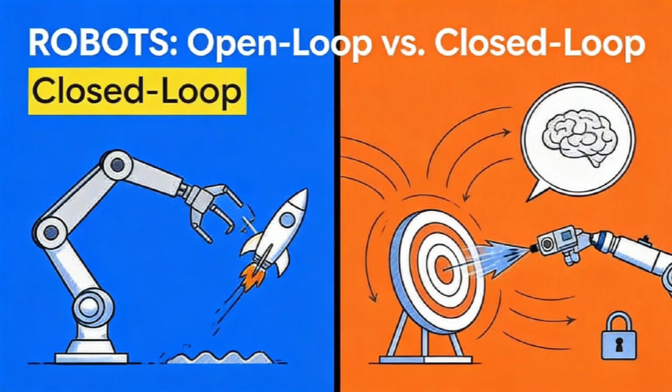Hello and welcome. Have you ever looked at a robot arm and just wondered, how do we get a pile of metal and motors to move with such incredible precision, sometimes even with a sense of grace? Well, today, we're going to dive into exactly that. We're going to follow the journey of a robot as it learns to move, evolving from a blind, clumsy machine to one with a perfect touch.

So let's start with a really simple but totally fundamental question. You tell a robot arm to move exactly 10 centimeters. But what if something gets in the way? What happens when the messy, unpredictable real world interferes? Honestly, figuring this out is the first major hurdle for any robot that has to operate outside of a perfect, sterile lab. And this problem brings us right to the most basic type of robot control out there. It's called open-loop control. It's simple, it's cheap, but it has one massive and sometimes pretty dangerous flaw.

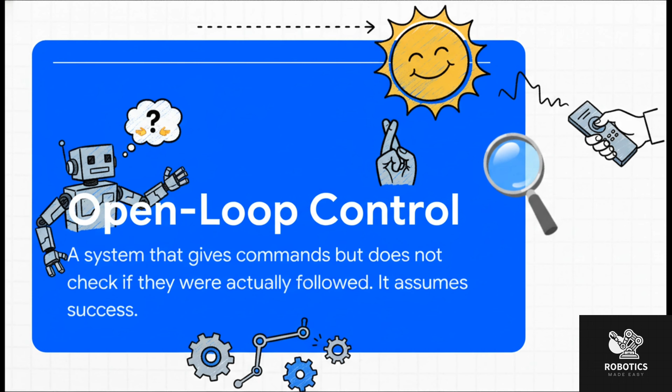Okay, so imagine telling a robot to do something and then just walking away and hoping for the best. That's open-loop control in a nutshell. The controller sends a command, and then that's it. It just assumes with total confidence that the command was carried out perfectly. There's zero feedback, zero confirmation. Take a look at this paint sprayer example and focus on step 4. The system assumes it worked.

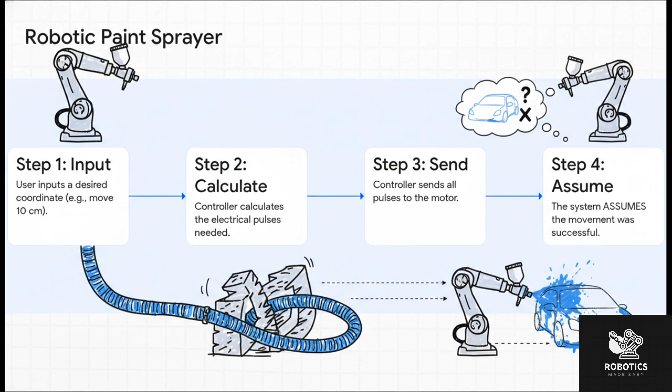Now, let's say the paint hose gets snagged on something. The controller sends out all the electrical pulses it thinks it needs to move 10 centimeters, but the arm only moves 5 before it gets stuck. Well, the controller has absolutely no idea. Its internal map of the world is now just wrong. It thinks it's at the 10 centimeter mark, but it's not. It's a complete leap of faith.

This is just a perfect way to think about it. The robot is basically blindfolded. It's just following orders, completely unaware of its surroundings. So if it hits a wall halfway, it'll just keep marching in place, totally convinced it reached its destination. You can see how its idea of where it is gets completely disconnected from the real world.

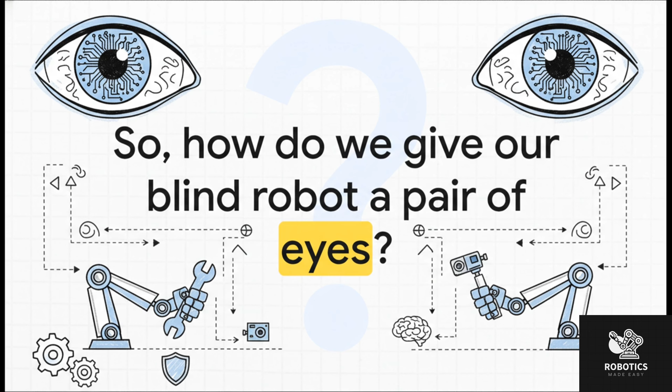So that's the big question, right? How do we fix this? How do we give our blind robot some kind of sense, a pair of eyes, so it knows what's actually happening? Because if we can't solve this, our robot will never be reliable or safe. And that leads us to the solution, which is an absolute game changer. We're going to introduce the concept of feedback. We are going to close the loop and give our robot the ability to sense its own actions.

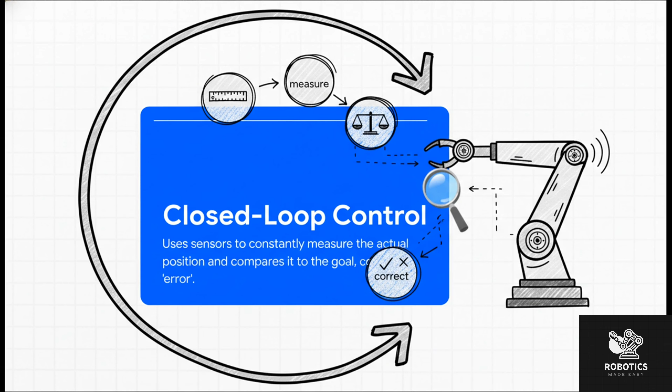So let's go back to our paint spraying robot. Now, with closed-loop control, if that hose gets snagged, the sensor screams, hey, we're stuck. The controller sees that error and can actually increase the power to the motor to push through the obstacle. It can fight back. It becomes an adaptive system.

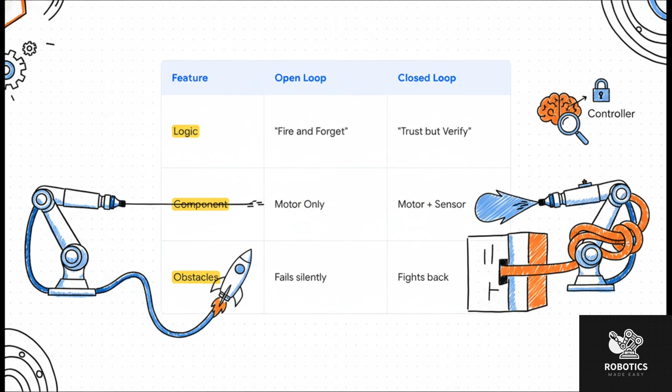All right, so problem solved, right? The robot now knows where it is, and it will always get to its target. But as always in engineering, you solve one problem and another one pops right up. Now the question is, how does it move smoothly? How do we keep it from being a violent, shaky mess that just destroys itself? This is where we get into the actual brains of the operation, the control algorithms.

And to make this super clear, let's use a cool analogy, a delivery drone that's trying to land perfectly on a small balcony. Okay, the simplest approach is called proportional control, or P control. The logic is simple. The control signal is proportional to the error.

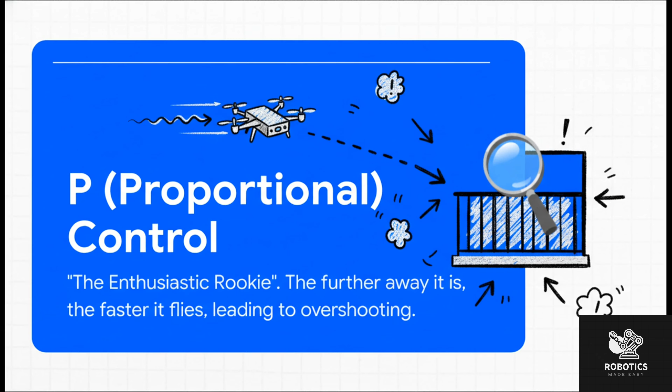In other words, the further away the drone is from the balcony, the faster its motors spin. Makes sense, right? But the problem is momentum. As it gets close, it's still going way too fast, and it overshoots the target. Then it tries to correct and overshoots in the other direction. It ends up just wobbling back and forth like an enthusiastic rookie pilot who's all gas and no brakes.

So how do we fix this? We add a D for derivative control. Now, don't let the math term scare you. All derivative means here is the rate of change. So this part of the algorithm is just looking at the drone's speed.

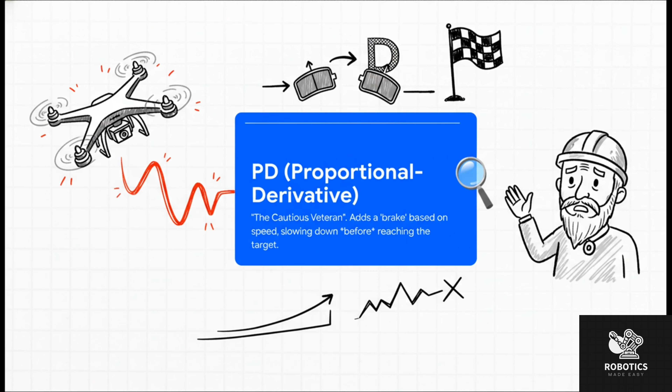It's like a cautious veteran co-pilot. It sees how fast the drone is approaching and thinks, whoa, whoa, slow down, we're coming in way too hot. It applies a braking force that's proportional to the speed, effectively damping out the P controller's wild enthusiasm. And the result? A beautiful, perfect, smooth landing.

Okay, but what if there's a constant nagging force, like a steady wind pushing down on our drone? A PD controller might get it to hover just an inch below the balcony, stuck in a sort of stalemate. This is where the I for integral control comes in. The integral term is like the robot's memory. It accumulates the error over time.

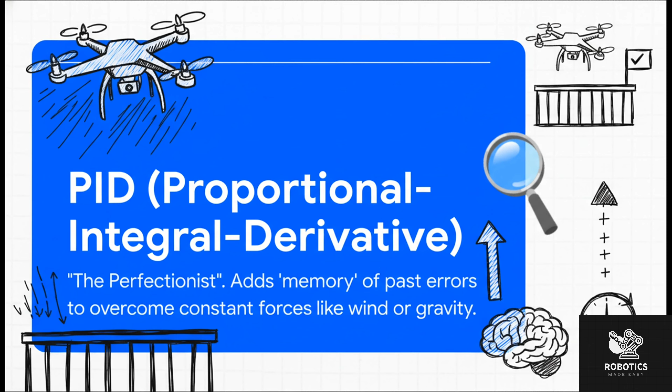It sees this tiny, persistent error and says, you know what, we've been off by a little bit for way too long. It then slowly but surely ramps up the power until it overcomes that wind and nails the landing perfectly. By the way, this PID logic is the secret sauce in everything, from your car's cruise control to the thermostat in your house. Okay, so our robot is now a master of movement.

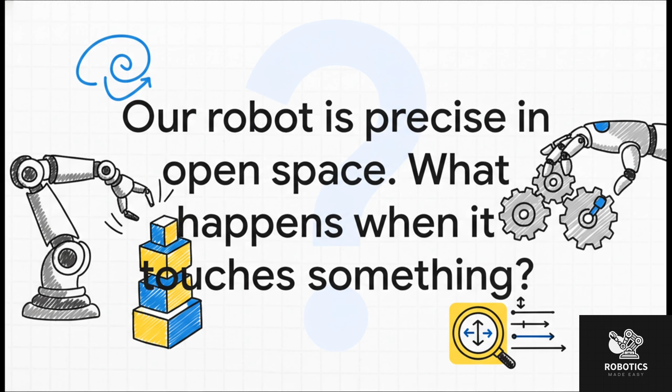It's fast, it's smooth, it's incredibly precise, as long as it's just moving through empty air. But let's be real, we want robots to actually do stuff, to interact with the world, and that means touching things. This brings us to the final, and maybe the most fascinating upgrade. See, up until now, everything we've talked about has been about telling the robot where to go. That's all position control. But now we have to teach it something totally new, how hard to push. Welcome to the world of force control.

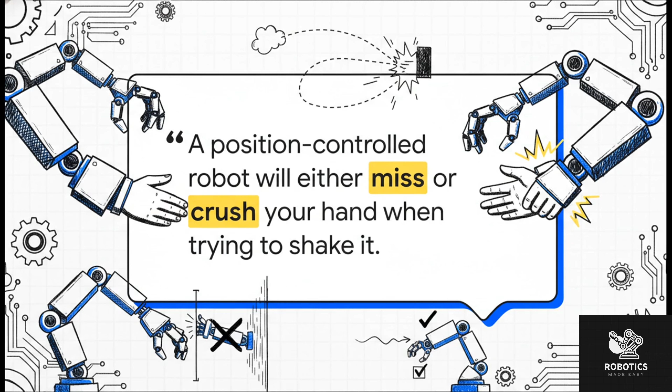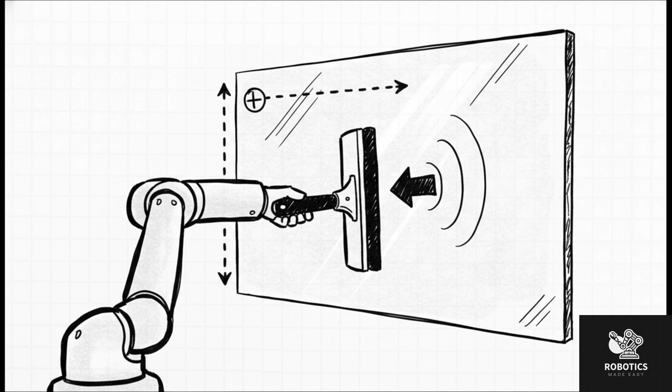So what's the solution? Well, it's actually really clever. You don't pick one or the other. You use both at the same time. It's called hybrid force control. Let's go with the window wiping example. Moving up and down and side to side along the glass, that's all precise position control. But in the direction pushing into the glass, that's where it switches to force control. It's programmed to maintain a constant, gentle pressure, ensuring it cleans effectively without shattering the window.

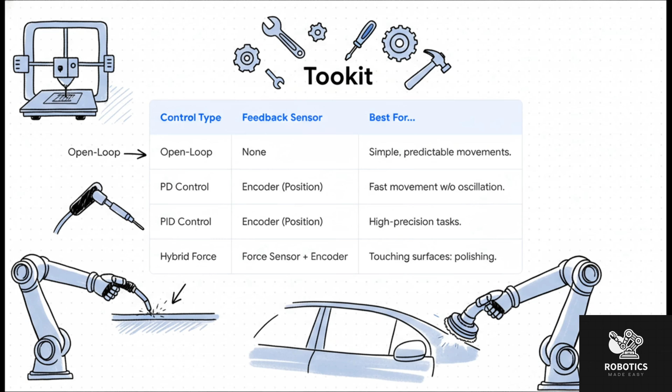So what we've really been doing this whole time is building a toolkit, and this chart really summarizes the whole journey. Each one of these control strategies is the right tool for a specific job. You've got the dead simple fire and forget open loop, which is perfect for something like a 3D printer. You've got high-speed, smooth PD control for most industrial arms, all the way up to hybrid force control for delicate tasks that need a sense of touch, like polishing a car or carefully grinding a surface.

So when you step back, it's a pretty amazing progression, isn't it? We started with a blind machine that was just guessing. We gave it eyes so it could see where it was. Then we gave it coordination so it could move gracefully. And finally, we gave it a sense of touch. It just makes you wonder, what comes next? What's the next human sense we're going to figure out how to engineer into these incredible machines?